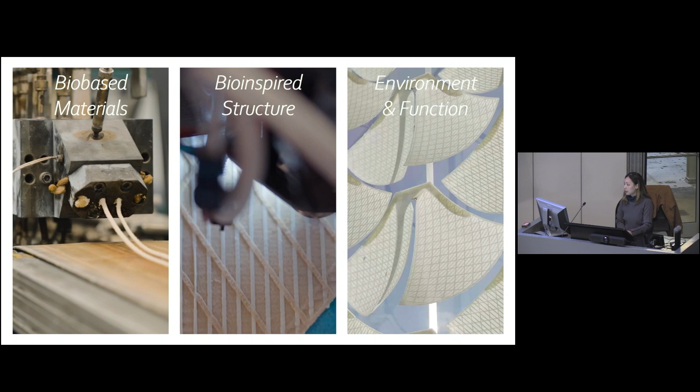For example, in developing new bio-based materials, in order to turn properties that are normally considered disadvantages, such as swelling and shrinking, into advantages. Also studying biological role models in order to mimic their structural layering and transfer them using emerging technologies such as 3D printing. And finally, in designing and programming new types of mechanisms whose functions are 100% powered by the environment.

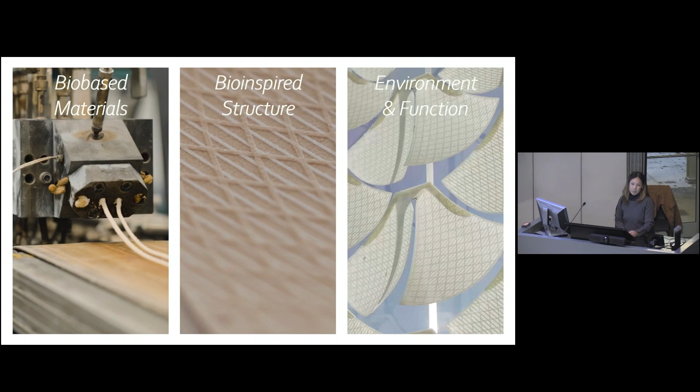By integrating and synthesizing knowledge from diverse domains, I believe that we can create bio-inspired structures that change shape without consuming any operating energy, as an alternative to conventional methods of design and making.

Before I go into details of how that works, I want to share a little bit about where I'm coming from. So I've been making things for practically my entire life. I actually built my first 3D printer roughly 15 years ago.

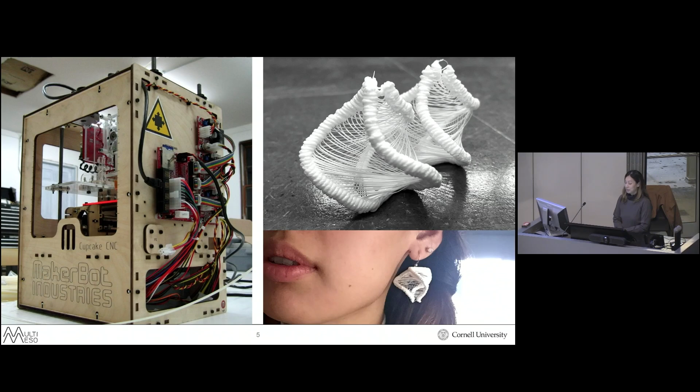Besides 3D printing, I've also built a huge variety of projects ranging in size from origami robots to large-scale art installations. And having made so much stuff throughout my life, including buildings while I was working as an architect, I became increasingly confronted with the environmental responsibility that comes with the act of making.

According to a recent study, this anthropogenic mass has now surpassed the biomass. And in fact, the overall biomass has actually decreased, mainly because of deforestation and environmental degradation caused by our overall manufacturing activities. This really made me realize that the climate problem is really a problem related to how we are using materials.

Most of this human-made anthropogenic mass are things like buildings and roads, and manufacturing these construction materials is responsible for 9% of global annual CO2 emissions. Building operations like active heating and air conditioning for maintaining occupant comfort are responsible for 28% of global emissions. So over two-thirds of all carbon emissions are linked to our industrial activities.

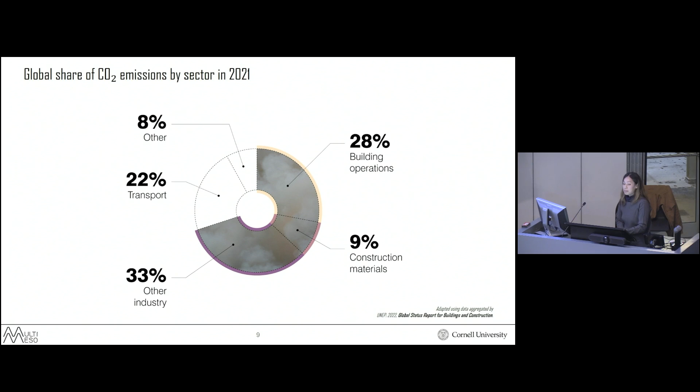Well, I think we can look to nature, because nature is incredibly productive. It's silently manufacturing its own goods every second, producing and growing biological materials through abundant material and renewable energy resources. It's fabricating intricate material structures which are highly performative and multifunctional. For example, trees can grow over 100 meters while transporting nutrients using minimal material. And those functions can be powered using free energy inputs from the environment, such as the sun.

Plant materials can move, changing their shapes and properties in response to the environment through growth and other mechanisms. But I'm particularly interested in the mechanisms of seed dispersal you can see here, from the folding of pollen grains, the opening of pine cones, to burying seeds and even exploding cucumbers. These are all really interesting, especially because they don't require any active metabolism to function.

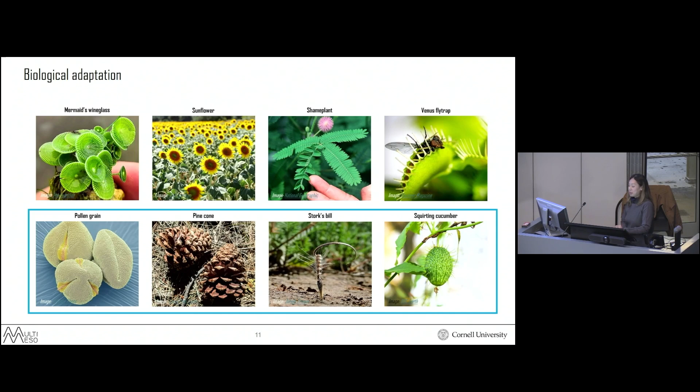And the pine cone, I think, really nicely illustrates this principle because its material, structure, and function are so tightly integrated that it can reliably open its scales without consuming any metabolic energy. In fact, it's technically a dead tissue when it's disconnected from the living supply of the tree. And indeed, my biologist partners have found fossilized cones which can still open and close after being roughly 14 million years old.

And this is why I love working with biologists. Now taking a closer look at the material structure of the pine cone, we can see how the cellulose microfibrils are arranged in two directional layers. This bilayer structure is what causes the pine cone to swell or shrink in response to moisture changes.

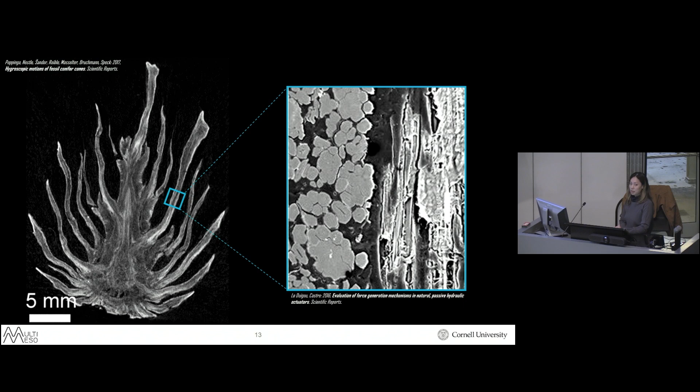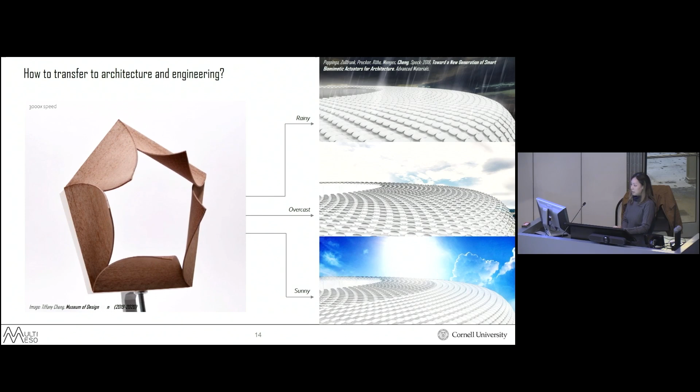My goal has been to investigate how we can apply strategies from biology to the design and manufacture of our products and buildings. For example, in building skins that can autonomously provide shading or ventilation depending on the weather. And I even have a hope that one day we can completely replace conventional heating and air conditioning with more sustainable strategies. In the next projects, I'll be introducing my previous research in working towards this goal.

Fused filament fabrication is especially conducive to emulating that fibrous structure of biological materials for creating these bioinspired, shape-changing systems in a process called 4D printing. Even though 3D printers and materials are really cheap and accessible, one of the core challenges is how do we design for 4D printing, which is a very different paradigm than our current practice of designing static objects and only designing the boundary of those objects.

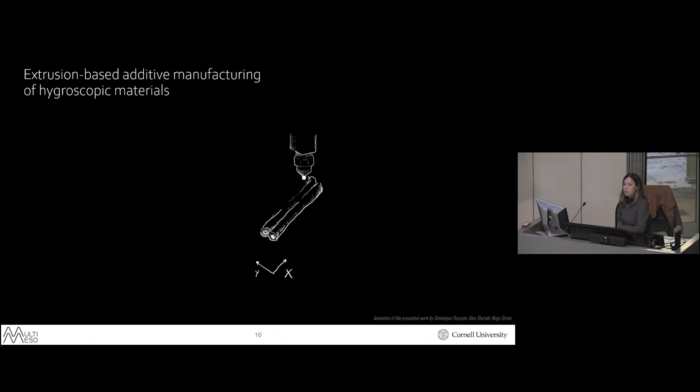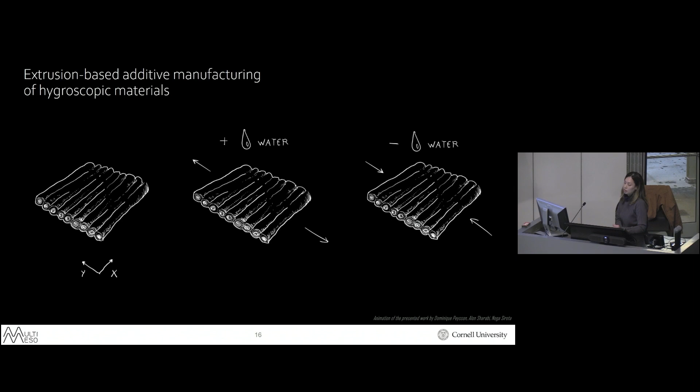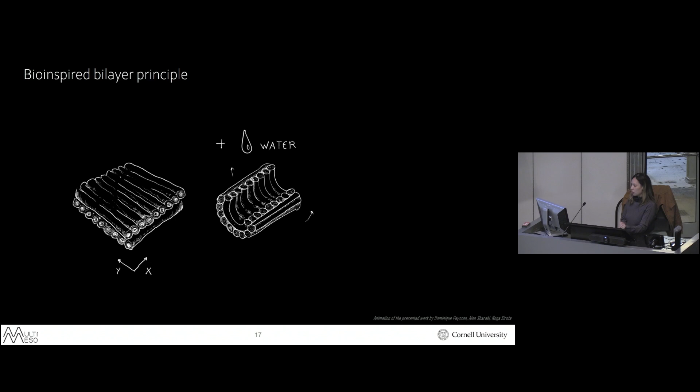First I want to explain how 4D printing works: through the process of extrusion, it leaves anisotropic features on the material layer, which when printed with a hygroscopic material like wood filaments, swells or shrinks directionally. And by printing a less swellable layer on top of this existing layer, similar to the pinecone structure we saw earlier, the resulting bilayer bends in one direction when swelling and the other direction when shrinking.

To develop the tools for 4D printing, my first steps were to explore this principle in a systematic way by programming the extrusion paths with different parameters, such as the spacing and layer height between those paths. With that, you can control the bending in different directions, the amount of bending, and even the speed of bending. And by combining and stacking together these different bilayer building blocks, as I call them, you can expand the geometric possibilities.

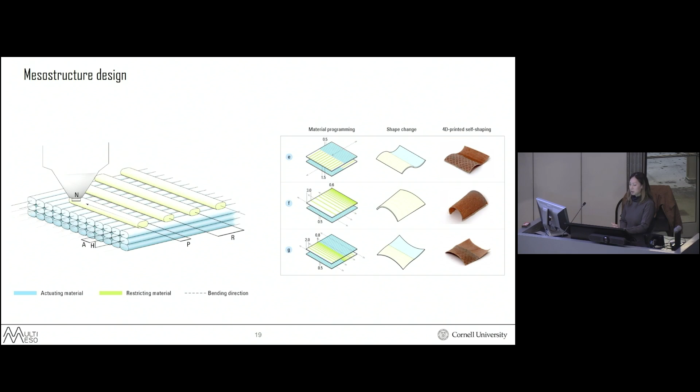So the mesostructure, which is created by this extrusion process, is kind of like an analog material code that tells the programmed material what shape it should transform into.

And in order to understand and verify how such a material's mesostructure reacts to environmental humidity, I printed various permutations of those extrusion parameters and tested them in lab-generated conditions.

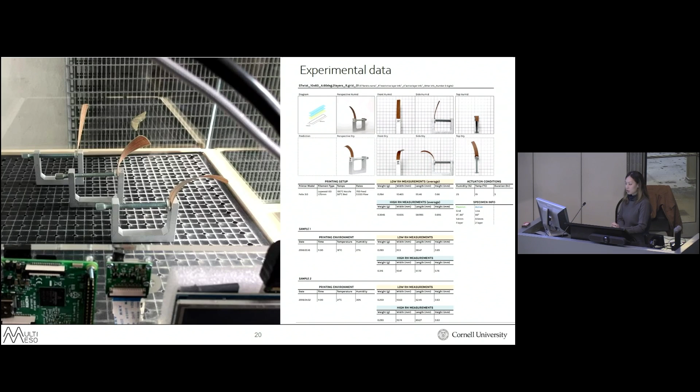The results of these experimental data were then used to inform the development of the computational fabrication workflow for configuring an assembly of bilayers within established CAD software like Rhino 3D.

And we can preview the shape change of the combined bilayers and then also generate the low-level machine code for creating intricate mesostructures like what you see on the left here.

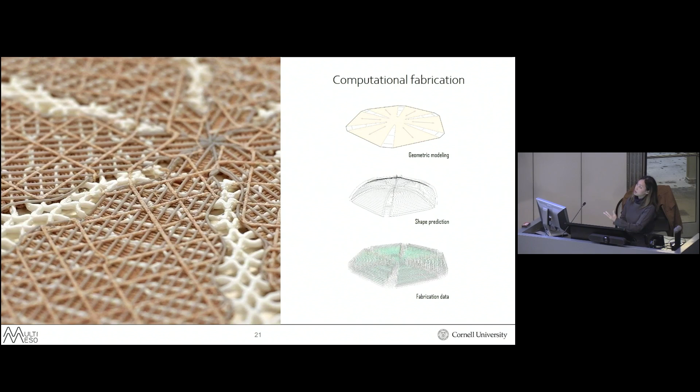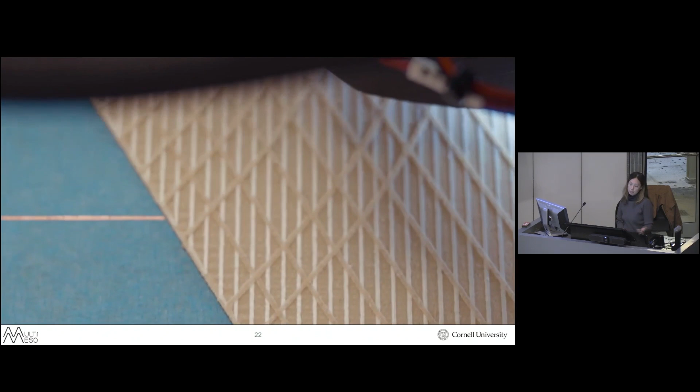So by integrating material and printing properties into this workflow, designers can then focus on the high-level design without needing to worry about how to organize each and every individual tool path or material path, or needing to learn how to write machine code. This enables the automated production from the digital design to the physical object.

And it allows for many types of material transformations like bending, expanding, folding, stretching, and even double curvature.

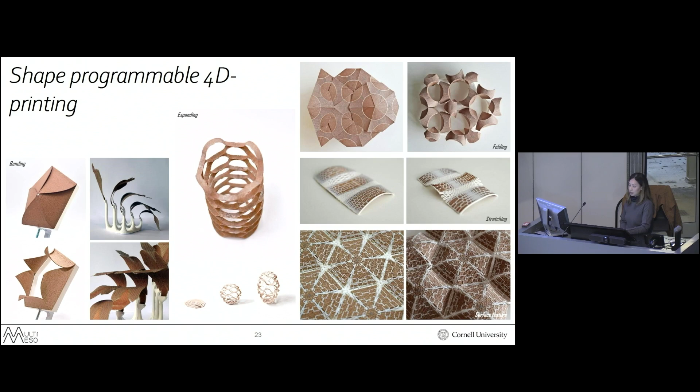So I've already shared these tools with my colleagues and students, and I taught a one-week workshop on 4D printing two years ago to bachelor students in architecture at the TU Graz.

And these are the work of my students. Some of them were quite new to parametric design. Some of them had never used a CAD modeling software, coming from more traditional architectural education. But over the course of the 5 days, they were all able to explore their unique ideas in self-shaping design, and I was proud that they could all physically realize them.

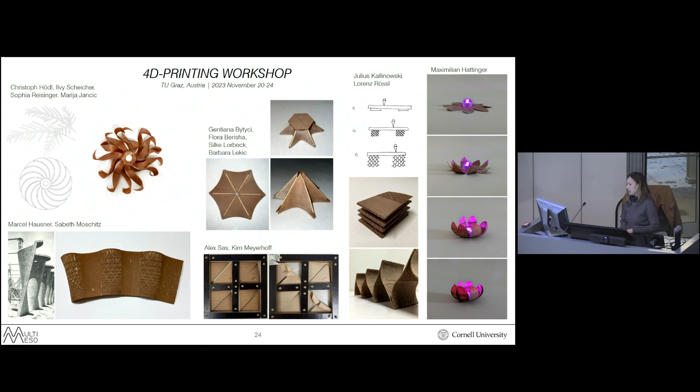So I think this is a very nice litmus test for the accessibility of 4D printing.

So the next challenge deals with how to transfer and upscale the methods that I just introduced from hobbyist 3D printers and off-the-shelf filaments to automation platforms and construction materials.

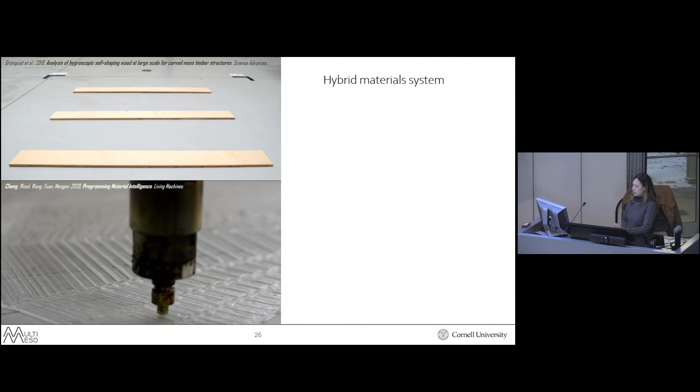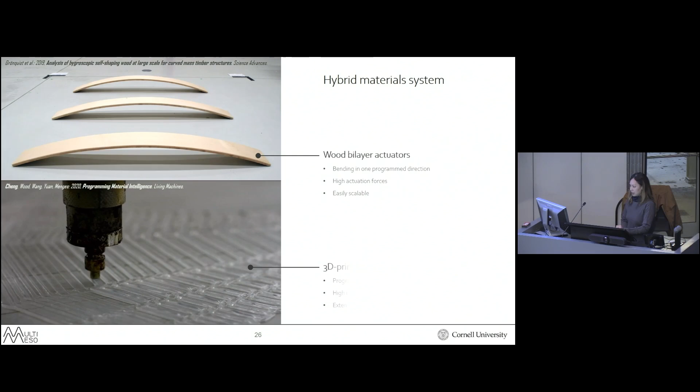In terms of the materials, wood is a well-known and easily scalable construction material that's very familiar to us. It's also used for self-forming bilayers with high actuation forces, albeit it has a low resolution of programmability. On the other hand, 3D printing allows for a high resolution of detail in customizing mechanical properties.

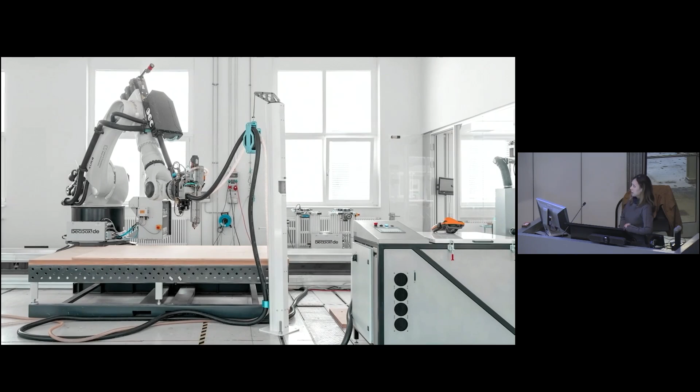So in order to combine both of these materials into a hybrid system, I developed a large-scale additive manufacturing platform with multiple end effectors.

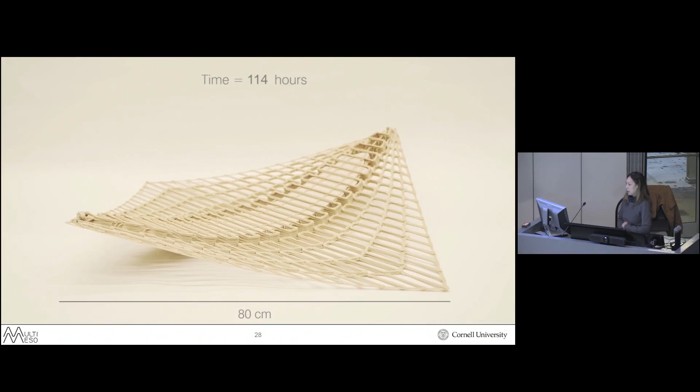including an integrated vacuum gripper for the pick and placement of the wood bilayer actuators, as well as a large format extruder for the 3D printing of metamaterial structures, to produce this biocomposite structure in which the wood and 3D printing work together to self-shape up to the meter scale.

Now, in transitioning from the small-scale 3D printing to the large-scale robot extrusion, it was necessary to make some adjustments in the extrusion toolpaths, which had to be continuous and non-crossing, due to the larger nozzle and delay caused by pressure buildup inside the barrel.

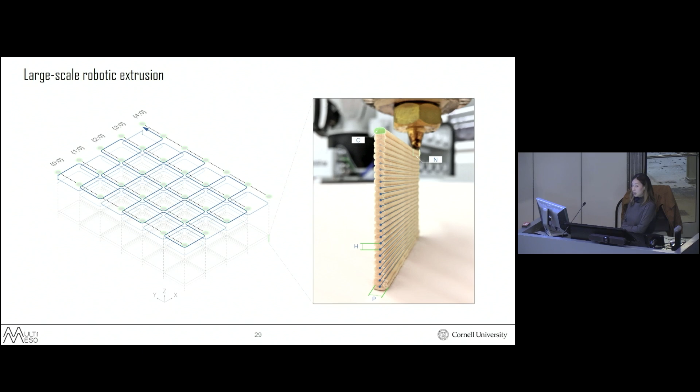So there's a lot that we can do at the small scale that we can't do at the large scale. I also had to recalibrate the 3D printing parameters, although the general relationships between depth, thickness, resolution, aspect ratio, and geometry remained the same.

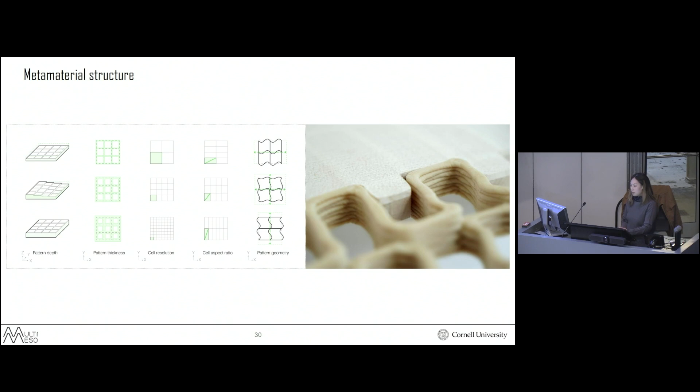So using geometry, we can then modulate those material properties in specific directions, such as physically programming areas that stretch in certain directions, areas of high stiffness, and also areas of bending in different directions.

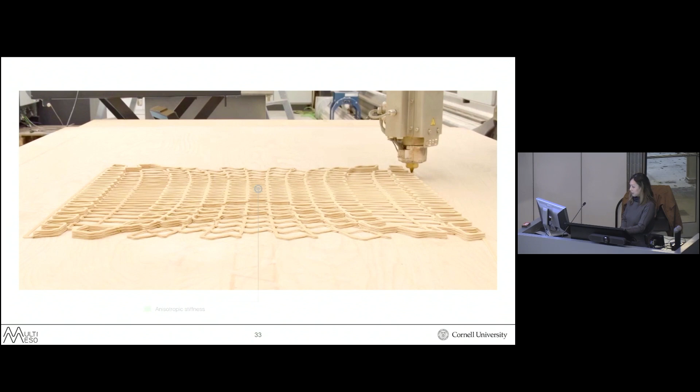So this biocomposite structure, just by acclimating its moisture content to the ambient indoor conditions, transformed from the flat fabricated state to a very complex doubly curved shape without any mechanical force or operating energy.

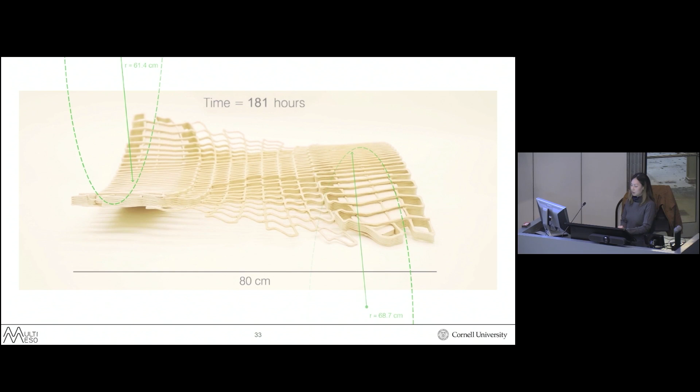And so based on this large-scale additive manufacturing platform that I developed, my master thesis students also explored this using the unique properties of auxetic metamaterials.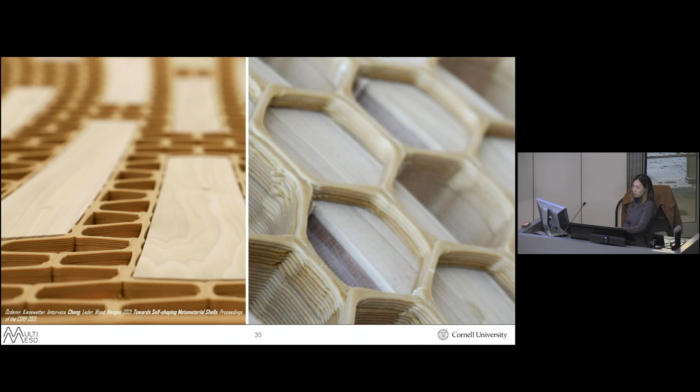And what's interesting is when you bend these metamaterial structures, it forms surfaces from positive to negative Gaussian curvatures depending on the pattern, from that hexagon to the inverted hexagon pattern.

So they exploited this property of those auxetic patterns in self-forming bending active shell structures by modulating the pattern to control that variation in double curvature across the shell structure.

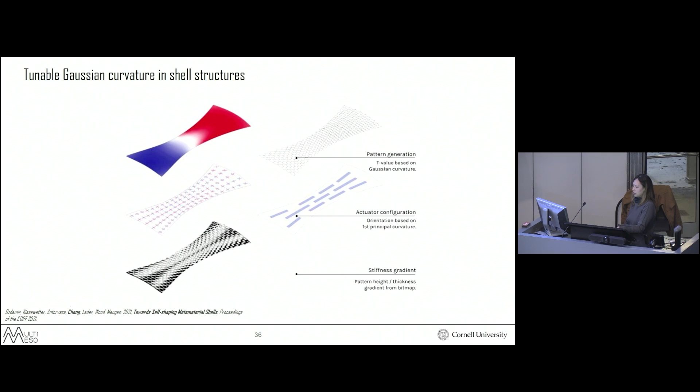And from a flat shape, which we fabricated in 13 hours, it formed into this functionally graded shell structure within 1 week. Considering the complexity of the shell structure, the functional gradation of the surface, and the fabrication technology itself, it's quite fast for such a size.

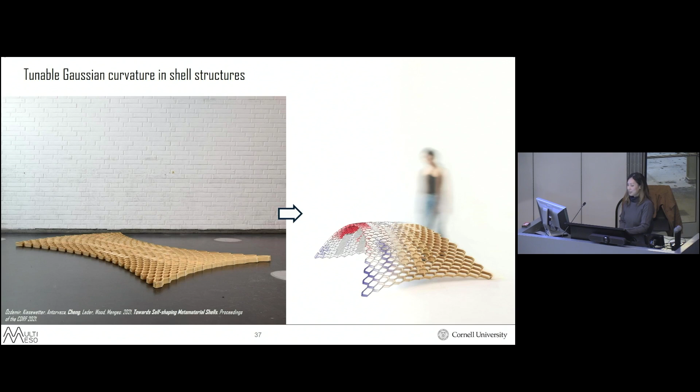So in the next project, I want to talk about how we can translate working principles from biology to design and engineering applications and vice versa. This project is a collaboration with the Plant Biomechanics Group and the University Hospital, both at the University of Freiburg. I use orthotic devices as a motivating example, since there's a need for both customization and adaptation for specific patient pathologies.

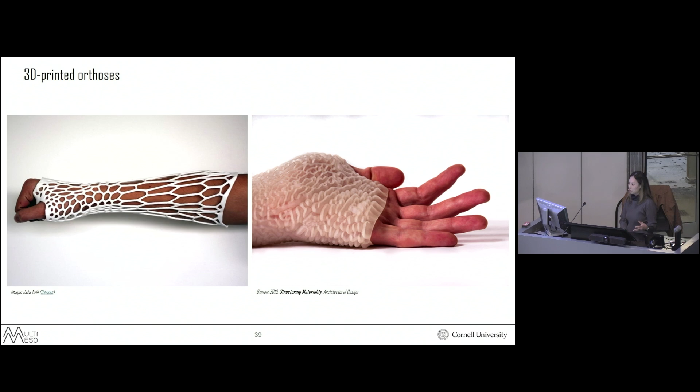Proper fit is very important for rehabilitation, and indeed 3D printing has become a very popular technique for creating personalized splints. It's able to work for a variety of shapes and sizes, but this doesn't really address the muscular atrophy that typically results from immobilization. This is when your limb gets thinner while you're wearing a cast, and that's also the reason why you've had to go to the doctor so often to get your cast refit, if you've ever broken your bone.

The biologists I worked with found interesting this air potato plant, which has a very clever strategy of climbing smooth supports without slipping off. It generates these high squeezing forces onto the host structure through stipules located at the base of its leaves. As this plant grows, the stipules expand, and thereby it tensions that stem helix.

So we then abstracted and transferred this tensioning mechanism to 4D printing. The squeezing behavior is set up in two phases. First, the stem helix loosely winds about its existing structure, and then pushes outwards with the stipules in order to stiffen. We then abstracted the functional principles and interpreted them: the first part as a twisting bilayer strip called the helix mechanism, and the second part as a bilayer flap called the pocket mechanism, which creates a pocket of space between itself and the helix on top of which it sits.

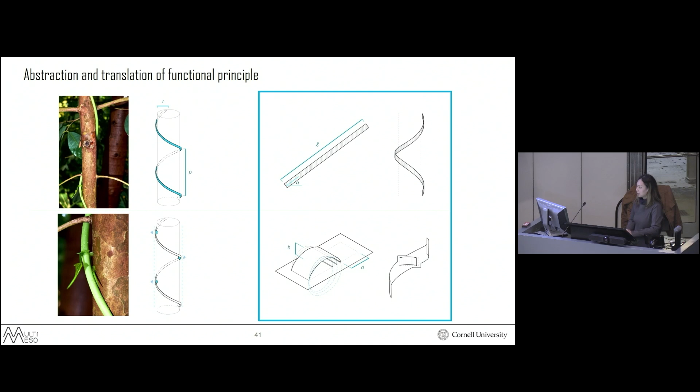So this is a summary of the biomimetic process. We take this tensioning strategy from the air potato plant, which was abstracted and then transferred to 4D printing through the design of those two mechanisms, the helix and the pocket. We can individually tune those mechanisms and combine them into a single material system, and evaluate them for applications where fit and grip are important.

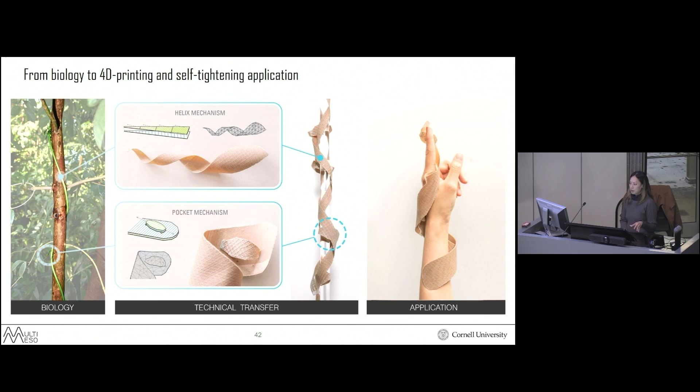The key was understanding the mechanism that the air potato plant uses in order to generate that force. So we measured the squeezing forces of our 4D printed material system and compared the different combinations of the two mechanisms. You can see the helix mechanism without any pockets in orange, which generated fairly low forces. Then the addition of those pocket mechanisms in low and high densities was able to generate increased forces to varying degrees.

But what we found was the most effective strategy was programming a delay in the pocket mechanisms, which was the most effective strategy for increasing the squeezing force.

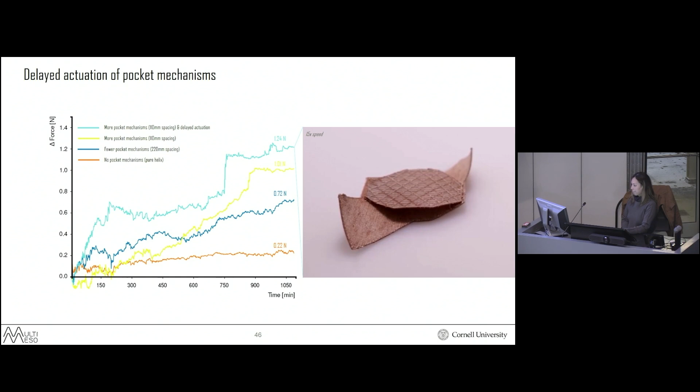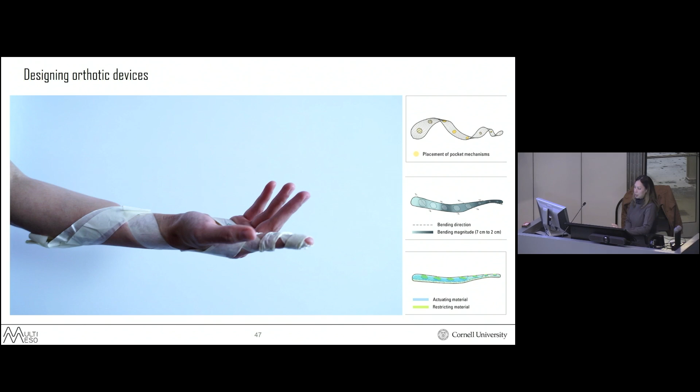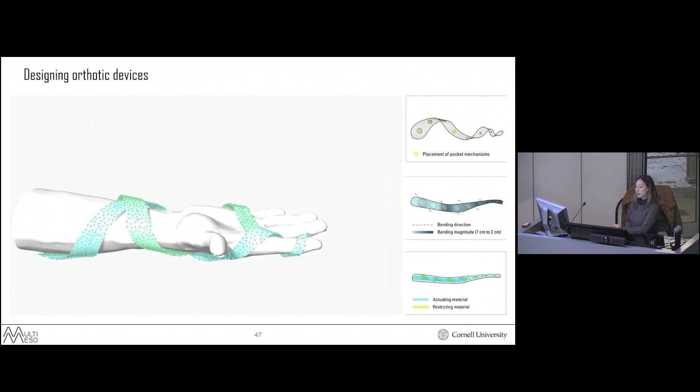Now, doctors who normally use or design splints are not necessarily experts in digital modeling, so we prototyped a design workflow in which physicians could physically prototype those designs directly on the patient's body, 3D scan, and then digitally analyze those curvatures and generate the fabrication data for 4D printing. This is really important for adoption outside of the lab.

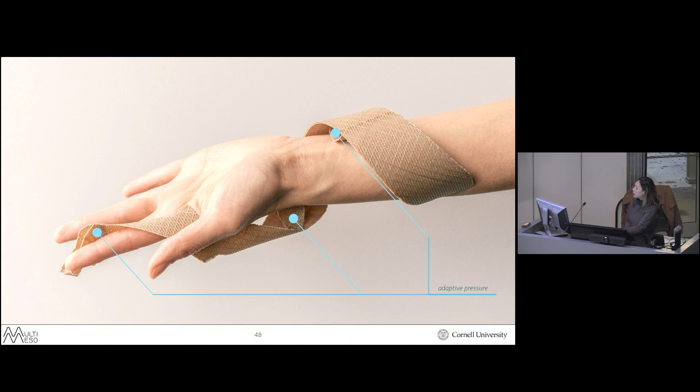So this is the design of the splint with the bioinspired mechanism, which self-tightens around the wrist and forearm at varying curvatures. What's most important to me is that we found we were able to generate a similar range of forces as the air potato plant when we mimic those stipules in low quantities, which is how they are found in nature.

And if we increase the number of those stipules and further delay their actuation using 4D printing, we were actually able to measure higher forces. So it was really exciting to see that through studying biology and using computational design and material programming, we can actually extend beyond what the plant role model can achieve naturally.

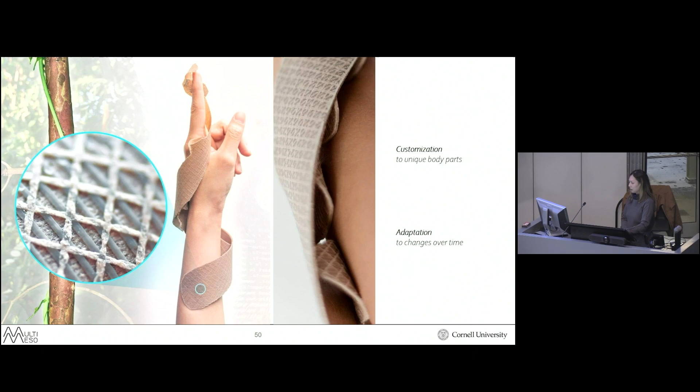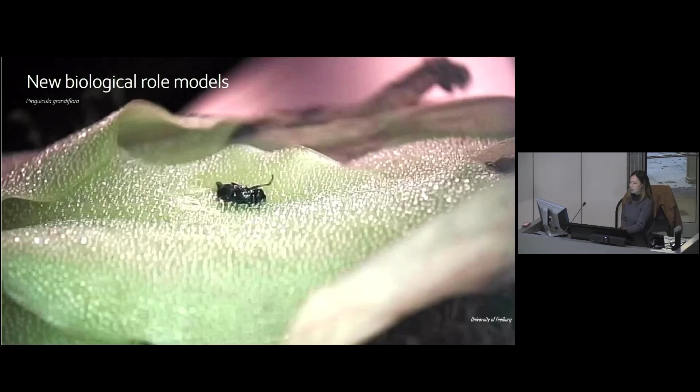So I just want to also say that not only can we take ideas from biology, we can also use 4D printing to better understand biological role models. So for example, this large flowered butterwort, it creates this bowl-like depression when triggered by prey. It's carnivorous. And the underlying cellular processes behind this deformation are not really well understood.

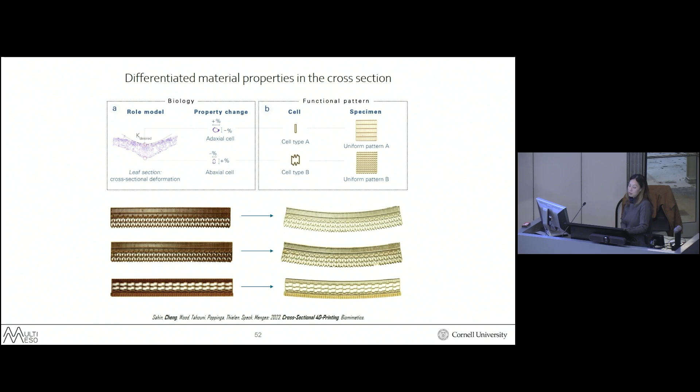So this is another collaboration with the plant biomechanics group, and they were very curious to use 4D printing to test their various hypotheses. So we used 4D printing to fabricate and test those ideas and try to understand the differentiated cell and tissue layers of the butterwort. And so in general, the approach of reverse biomimetics can help scientists also better understand the biomechanics of new plant role models.

So in this last project, I want to address the question I posed in the very beginning of my talk of whether or not we can apply bio-inspired 4D printing to the real world in actual buildings. And so this is another interdisciplinary collaboration with the Cluster of Excellence, LivMatS in Freiburg, as well as the Institute for Plastics Technology at the University of Stuttgart.

And the goal here was to adapt the foundational scientific research developed over the past projects I showed to a real building demonstrator application. The new challenges here were on integrating self-shaping design in real buildings, in a real environment, under real weather conditions across much longer time scales than we are previously used to, and also to scale up 4D printing to the level of a building facade.

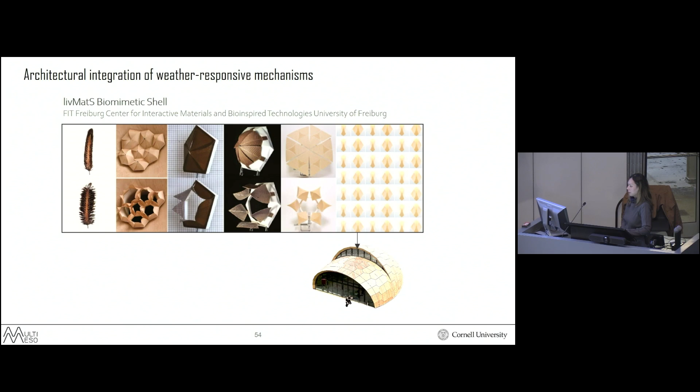So we used this LivMatS biomimetic shell building. It was a new project that is now located on the University of Freiburg campus as a case study. And together we designed the building and the self-shaping adaptive facade according to its specific conditions on the site.

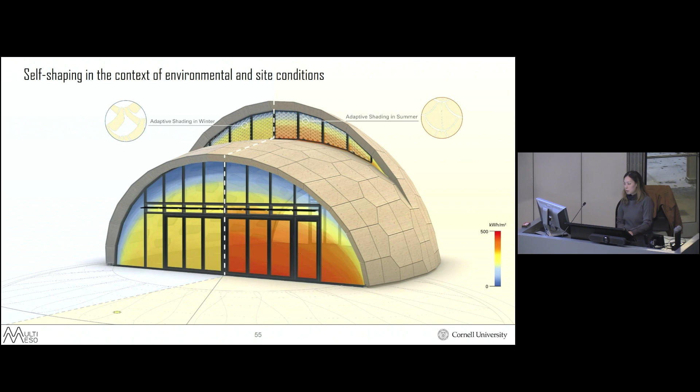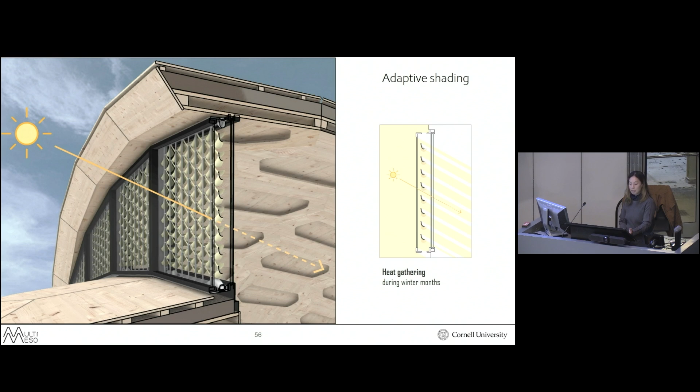So the south-facing orientation of the building made it possible for us to gather the maximum amount of solar heat available. And therefore, in the winter months, we aimed for the 4D printed shading elements to open and allow solar heat to enter the building. And in the summer months, they should then close to shield the building interior from high heat loads.

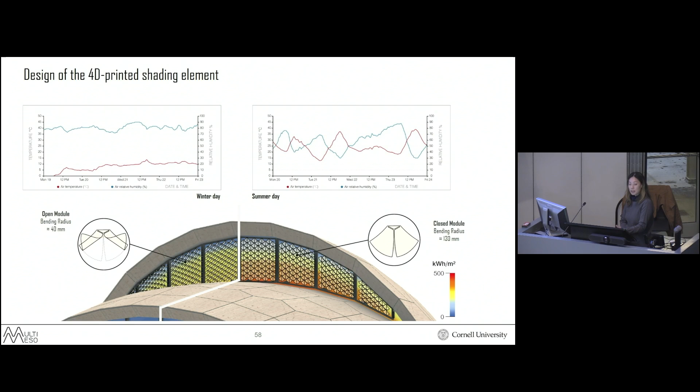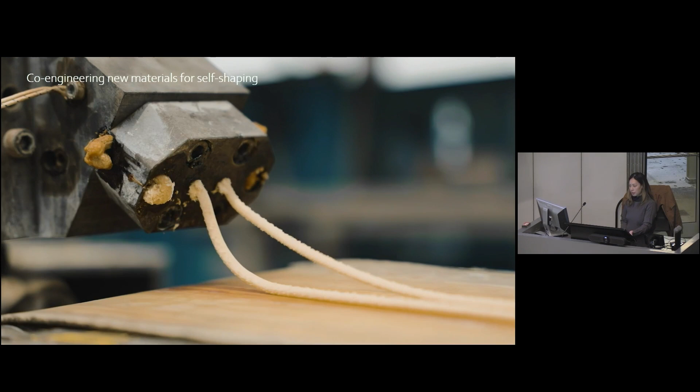And then we needed to design a material to match the response time to the time scale of weather changes in Freiburg. And so together with the material scientists, we developed a highly responsive filament material consisting of 35% cellulose content in mass ratio.

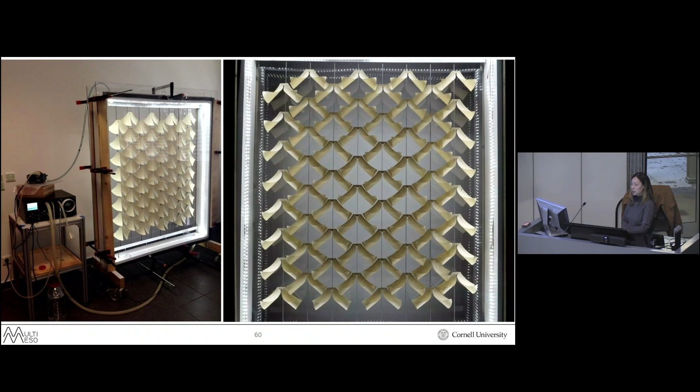We went through a very extensive testing process in the lab using an active microclimate generator to cycle many times, alternating high and low humidities, where we discovered actually that our LED adhesives were not very robust against high humidities. But also that our 4D printed materials could continue to operate against the disturbances unfazed by multiple attacks.

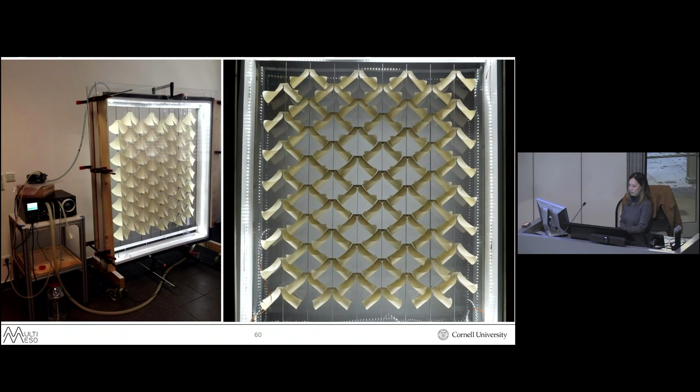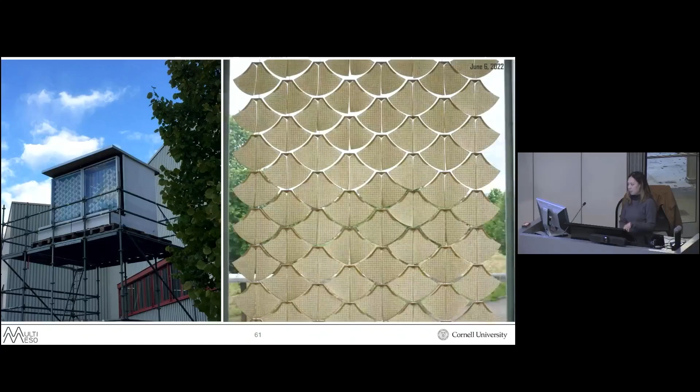And in order to test their performance under real weather conditions, I also built a mock-up of the facade in Stuttgart at the same height and orientation as the target building in Freiburg in order to simulate the 4D printed elements in the full range of humidity, temperature, and UV effects of that type of climate, across all seasons for over a year.

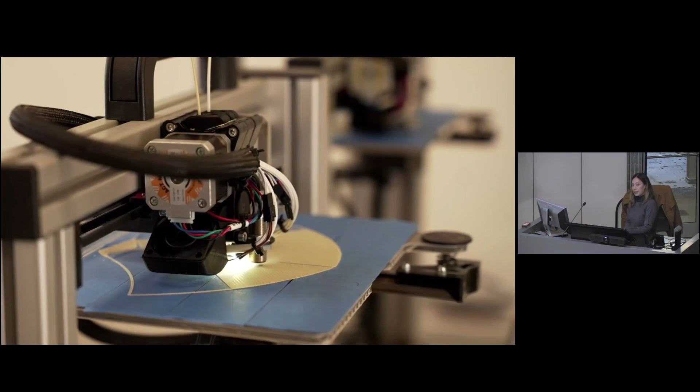And then with the assurance of our extensive testing, we then rented a total of 4 3D printing machines to fabricate almost 450 shading elements. Because of that very efficient mesostructure and the fact that it's all flat, each element only took 20 minutes to produce on average. And so the entire process of 4D printing that facade took 17 days and used less than 6 kilograms of materials. And the printers were not working 24 hours a day.

All of the 4D printed elements were then pre-assembled at our lab onto thin aluminum strips through this integrated 3D printed press fit connection. And after each window was then pre-assembled, they went through a short testing cycle again, just to make sure that there's no defect before the installation.

In the end, we had these 8 pre-assembled windows, and the 4D printed elements are very lightweight. So these very lightweight windows could be packed up into one minivan, driven to the construction site, and just unloaded by myself and my assistant, and simply installed from the roof without any cranes or any heavy machinery or equipment.

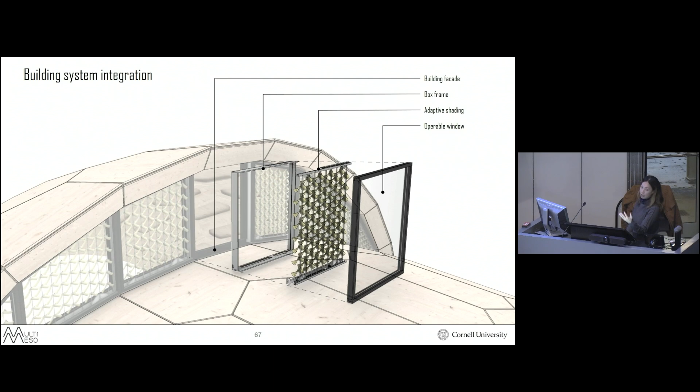So we designed this window system with operable glass doors, which allowed us to access that window box cavity for installation and repair or removal if needed one day. And I also want to mention that the window box frame is also vented on the top and the bottom, which allows those 4D printed shading elements to equalize with the outdoor temperature and humidity. And there are also sensors to keep track of the conditions and a camera to track the shape change of those windows.

So here it is in real life. And this is, to my knowledge, the first 4D printed weather responsive adaptive facade, which is also a real building. And I'm proud to say that it's open to the public, and it's also used by students, researchers, and faculty at the University of Freiburg.

So this is just a couple days after installation. Very happy to see those shading elements work immediately. So you can see in the morning, when it's cold, it starts to shade when the afternoon heats up. And just as a small side note, the electronics inside the windows, like the sensor tracking and monitoring, actually took more than a year to get working. So I think that speaks to the robustness and the simplicity of such a material system.

This is the view from the inside. And yeah, I think the feedback that I've gotten is that it's really interesting to be inside of a building that's sort of moving on its own, but a lot of the feedback I got was very positive. So this bio-inspired facade, I just want to end here and say that it requires zero energy to operate, right? It demonstrates resilience against things like power outages or the complex engineering and constant maintenance that's required for comparable electrical mechanical systems.

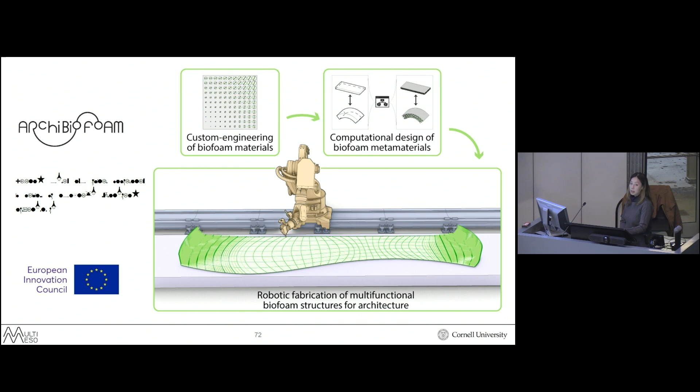So looking beyond facades, in a project that was recently awarded by the EU, we'll be looking at using monomaterial systems in a collaboration with material scientists and physicists. So we're hoping to use recyclable and develop biodegradable materials that are both load-bearing and shape-changing. And there are still so many lessons to be learned from nature. So how can natural materials be sustainable yet performative? And that's the overall mission of my research and what I'll be continuing to do here at Cornell University, to pinpoint how we can harness the inherent characteristics of natural materials to perform even more advanced functions.

And I hope to showcase bio-inspired design and making as a credible pathway to overcoming the competing resources between nature and technology towards a future where our technologies are no different from nature.